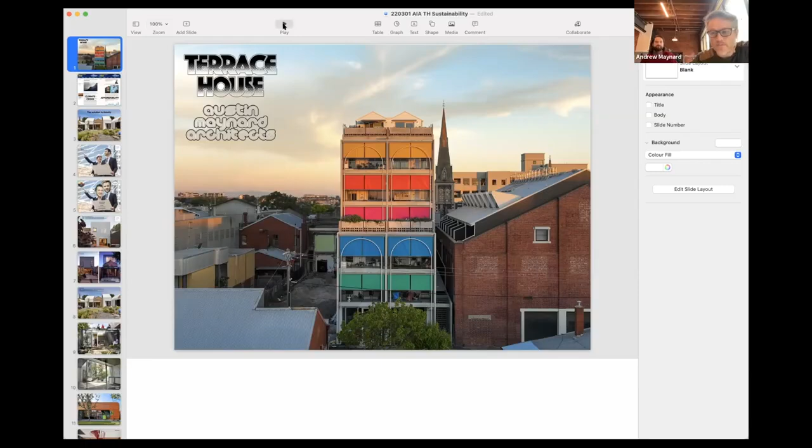So Mark Austin and I became developers. We've never done multi-res before. We all know the problems. We've got a climate catastrophe unfolding and affordability's never been worse.

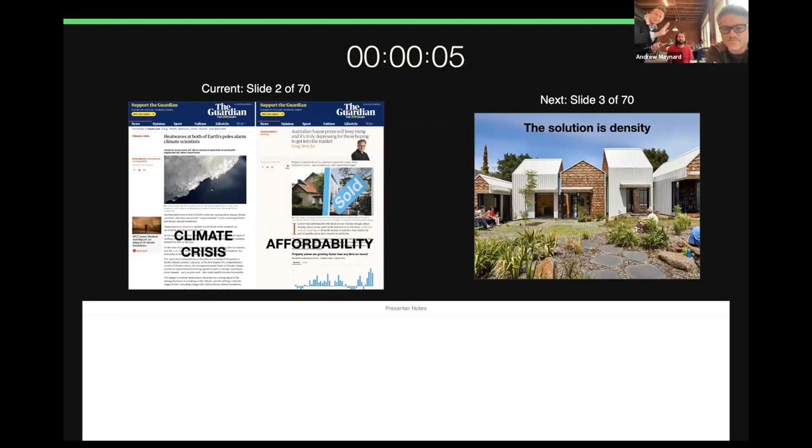Knowing that density's part of the solution, we've stayed out of it. And it's mainly because the developers that have approached us have been disinterested in solutions and in innovation. And they've really just wanted to leverage our brand. But it just got to the point where Mark and I sort of just said, well, shit, we better do it ourselves, put our money where our mouths are.

And the core things that we wanted to deal with were deliberative design. So just like we do in single residential, get to know our client base because they're owner-occupiers and design with them. That we centrally tackle climate change, that we have really good urban regeneration, we're financially sustainable now and into the future, and we use democratized capital.

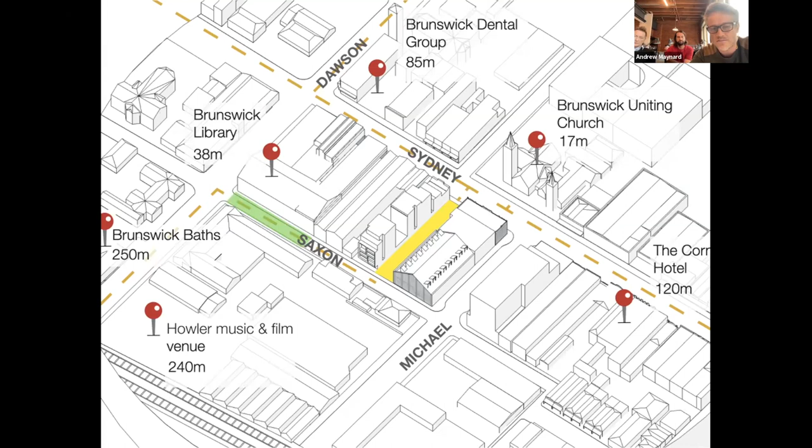Incredible location, right next to Brunswick Baths, the library, little pocket park right near Barkly Square shopping centre, but an odd site in that it faces east-west. It's only 10 metres by 57 metres long, so we only fit 4 apartments per floor plate and no aspect towards the north.

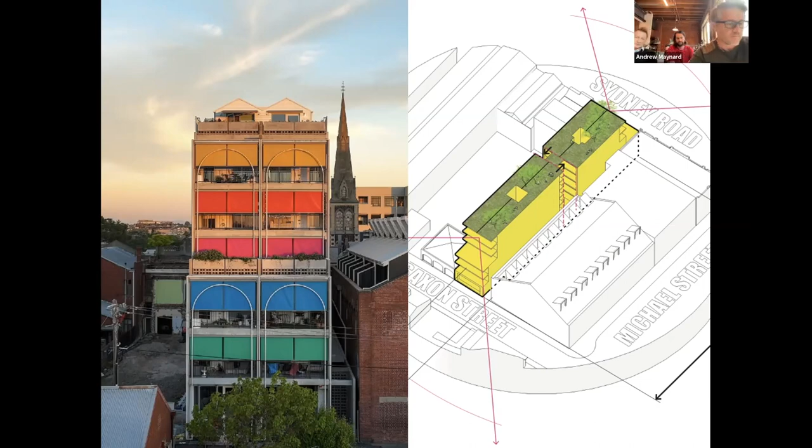So with east and west orientation, we invested in external roller blinds that not only protect the glass, but they actually are all the way out protecting the balconies, which is unlike the vast majority of apartment buildings you see all around Melbourne. All of this unprotected glazing, complete thermal heat sinks, relying on air conditioning to moderate temperature.

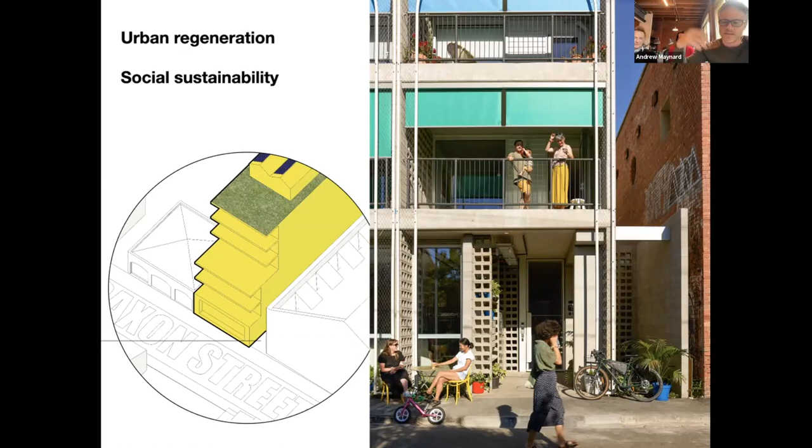We've got our main pedestrian access coming off Saxon Street. Saxon Street has got a checkered history, violent crime and the rest happening on there. So it's part of regeneration, having passive surveillance, but also activity in a cafe to help repair that part of the street. In terms of language, we're trying to tie in with the beautiful arches all the way up and down Sydney Road.

But before we built the building, we built the community. We've got artists, nurse, police officer, lots of people that have sort of been priced out of the housing market. They all had very similar sort of aggregated responses. Minimum costs now and in the future, maximum resilience. They wanted a tough building they could live in forever, and they wanted it to be simple where they could imprint themselves onto that building.

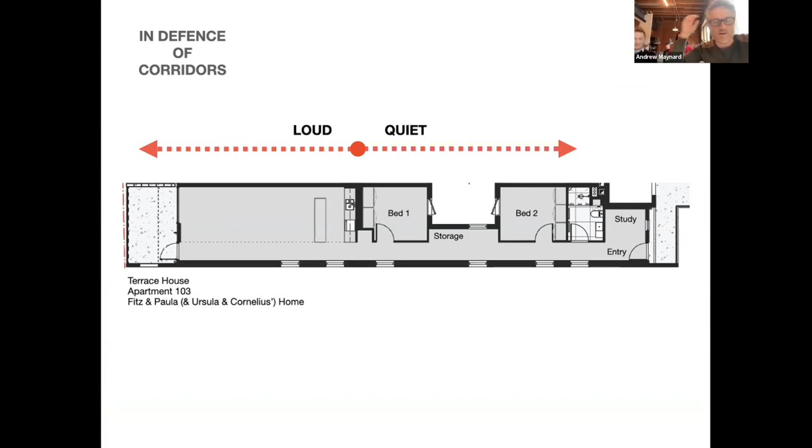And big was family. They wanted something in between a home and an apartment. So because of the size of our buildings, we went for a stacked terrace house plan. Sustainable transport, the bikes are all stored right at the entry gate. You don't have to bring it out of a basement or anything like that. Your bike is right there. It's the first thing you either pick up or drop off when you come home.

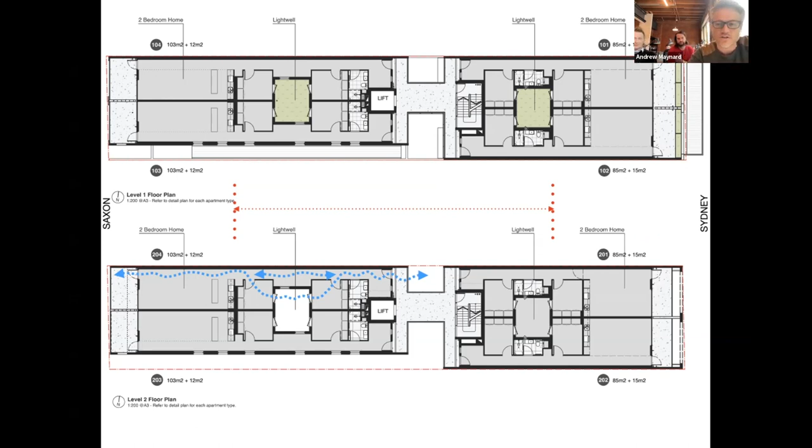Long, thin plans, incredibly well insulated, but if you need to purge it, you can throw it all open and get breezes through it. Between those red lines, it is identical on every single level. So we've got this great efficiency in terms of structure and servicing as well, driving down costs and increasing efficiency. Beautiful study spaces that create these communities within communities. But the fun stuff, the numbers.

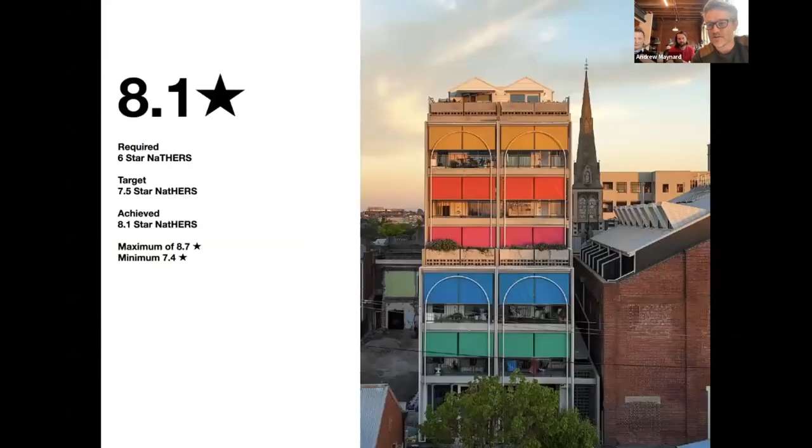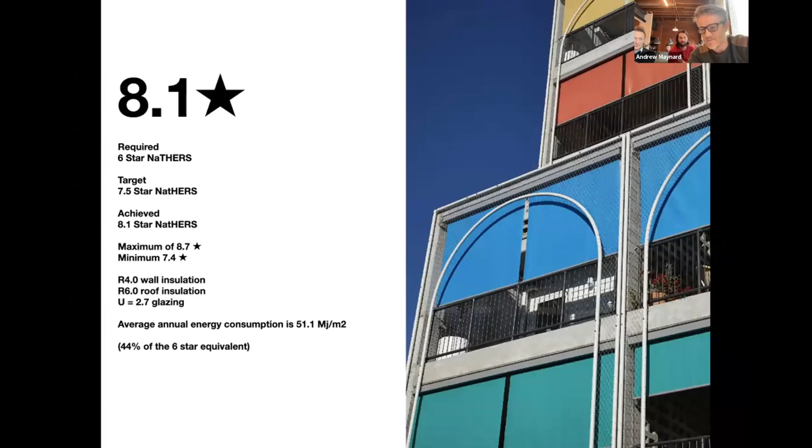8.1 stars. At the time when we got the permits, we had to achieve 6. We were aiming for 7.5 and we got to 8.1, maxing out at 8.7. You know, bulk insulation, really efficient thermally separated glazing, average annual energy consumption 51.1 megajoules per square metre, which is, by our calculations, 44% of what it would have been if it was a 6-star building in terms of the energy use consumption. The BESS rating, 77%, so obviously, you know, 70% being excellence, 50% being best practice.

The air tightness, out of control. We were aiming for a very high level of air tightness and we almost doubled it to almost Passive House standards.

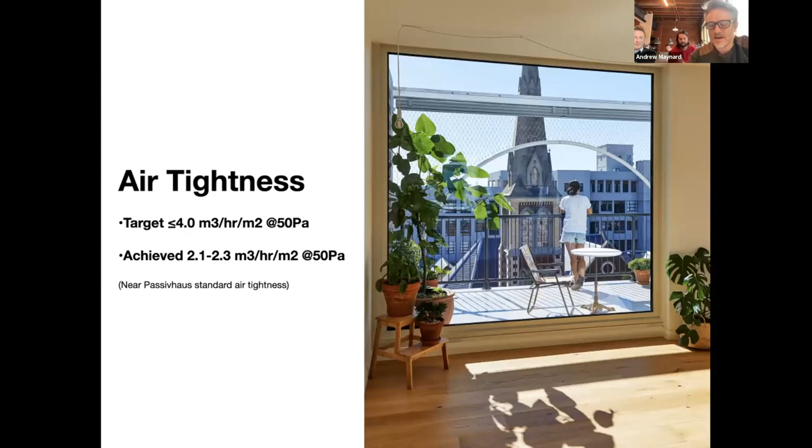And that's because we pushed the builder bloody hard, because we were investing in energy recovery units in every single apartment. They have their own energy recovery, so it's constantly moving fresh air and doing really efficient heat exchange with minimal energy loss. We're right in between trams and trains. So this is all about being able to get fresh air constantly and moderate the temperature without noise and dust.

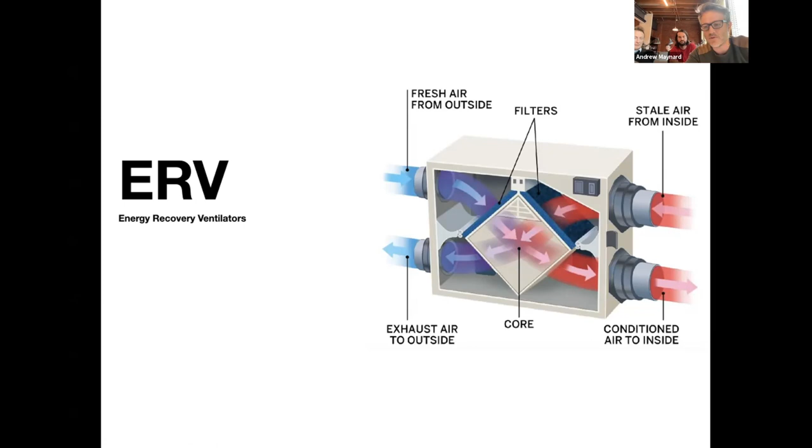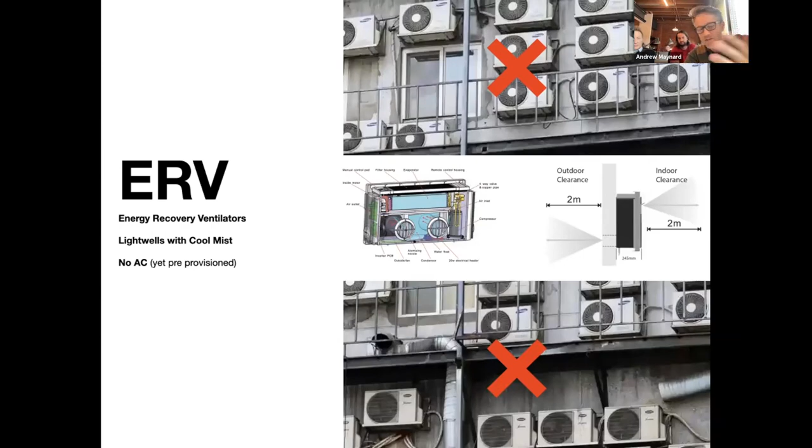In the light wells, we've got misters that are dropping the temperature by about 10 degrees, and that's where we're doing the air intake for the ERV, so we're already pre-cooling it in summer. No air conditioning, but it's designed, it's pre-provisioned. So in a climate crisis, who knows what the future will bring, and also people with health and age may need air conditioning, so that can be done in a very clean and efficient way.

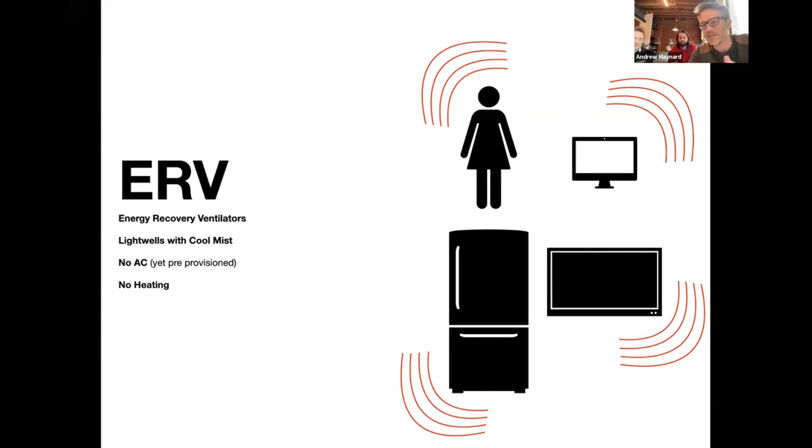There is no heating. Torsten, our passive house consultant, has designed the thermal envelope so that all the toys in the house and the human body will keep this temperature, and also the ERVs will keep it steady. But of course, the purchasers know they can add a really high efficiency electric panel if they need to in any space, knowing that the air is constantly circulating.

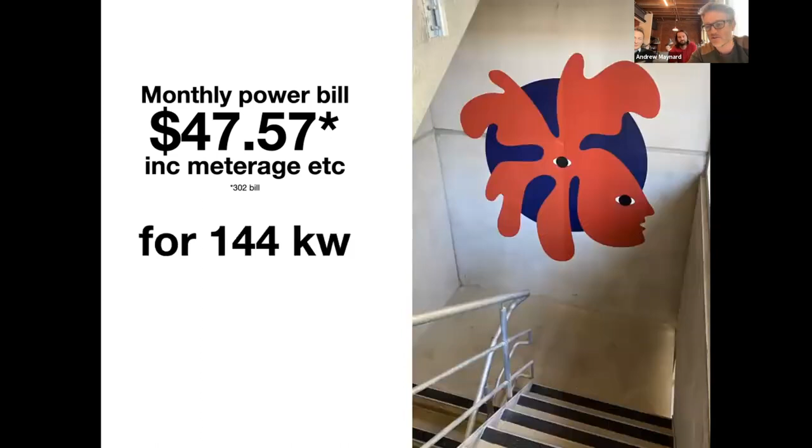Monthly power bills, it's only moved into in November. So this is all kind of rough information, but you know, $47 including meterage for 144 kilowatts. Average Victorian power bill, as you probably know, is about $137 a month.

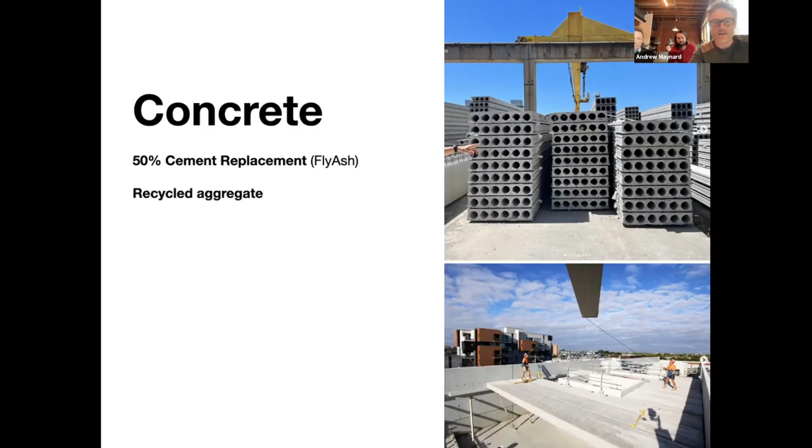The concrete is awesome. Hollow core, so we've got less concrete, but also we've taken out the central wall that goes through. So we've gotten rid of all that concrete, which is great for sound transmission as well. And we're bridging with planking elements. We've used 50% fly ash, recycled aggregate. We're going for 50% recycled water through the use of concrete. We did 100% with Kapitol, the builders.

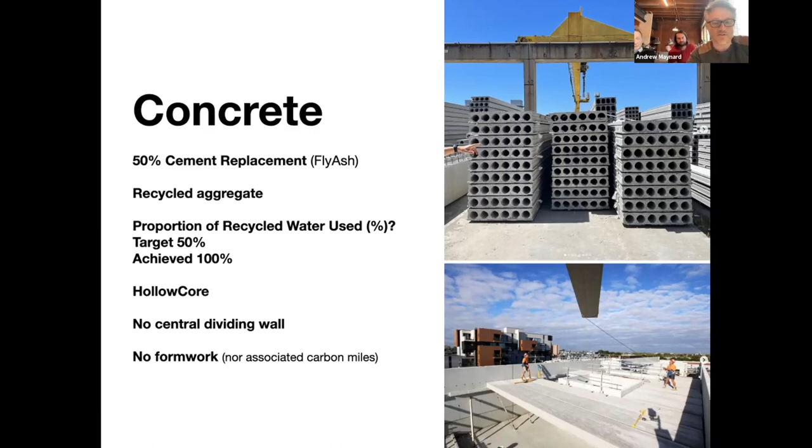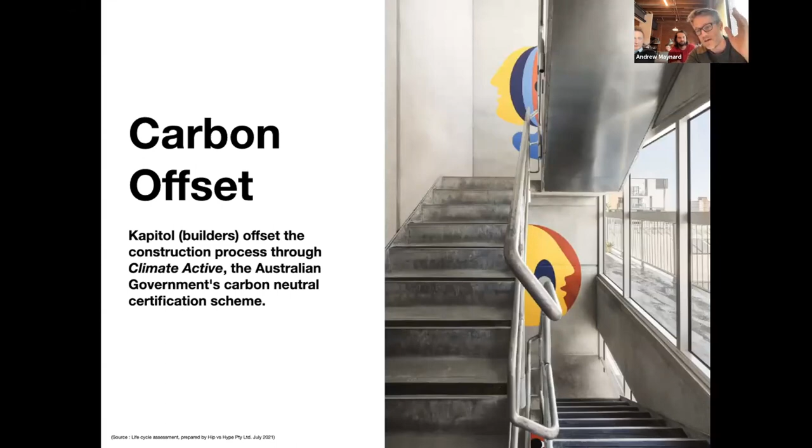No central dividing wall. That means no formwork as well. No mucking around, pouring wet concrete, having trucks and all of the carbon miles that are associated with that. So it's a sacrificial formwork as well as a structure. And then carbon offset, I found out about an hour ago, this hasn't been done yet. Kapitol doing carbon offset for the entire construction.

Carbon bill, all electric, no gas, fossil fuel free, 11 kilowatts of solar, which is the max we could get on this roof just because of orientation issues. Embedded energy network, buying green energy cheaper than you can buy coal. Electric cooktops, electric barbecue, low VOC.

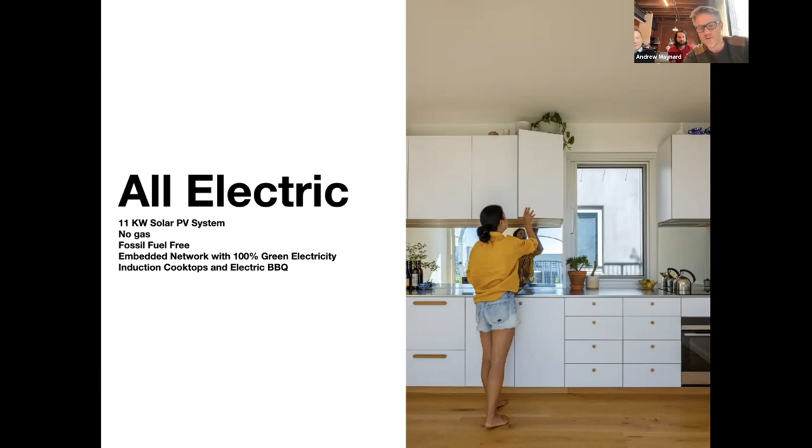1 minute remaining. What's that? Oh, 1 minute. 1 minute, yep.

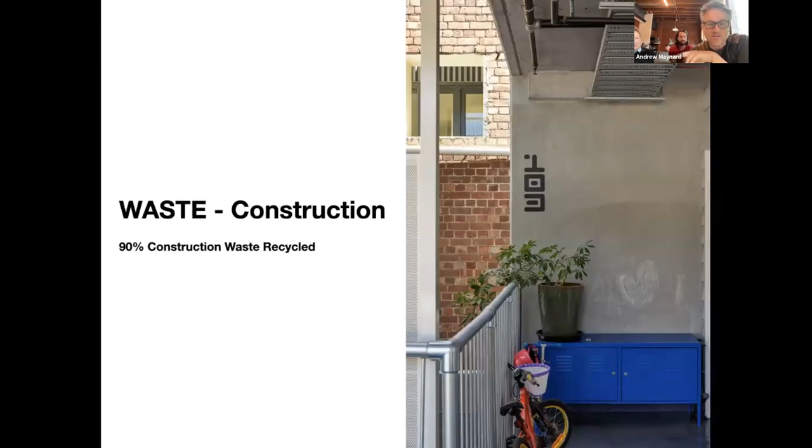Master switches, so you can shut down the apartment when you leave. Almost 90% of construction waste was recycled. And in terms of a great management plan for waste for residents as well, including battery and electronics recycling.

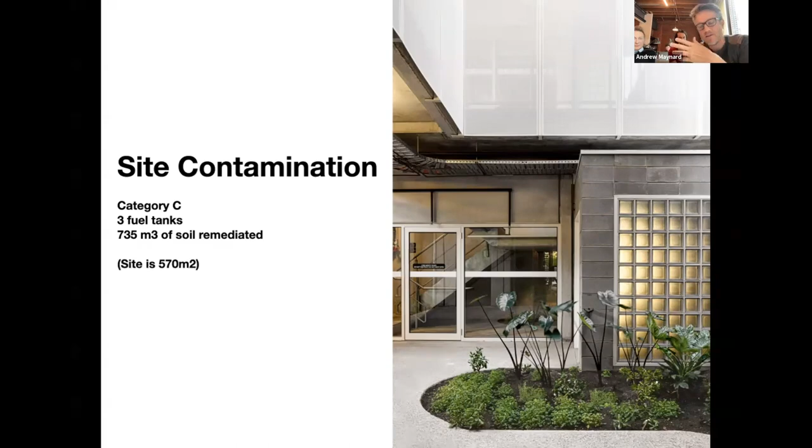The site was absolutely stuffed in terms of contamination. We found 3 tanks, and we pulled those out, and we remediated 735 cubic metres of soil. It's a 570 square metre site, so we basically dug a basement and remediated it.

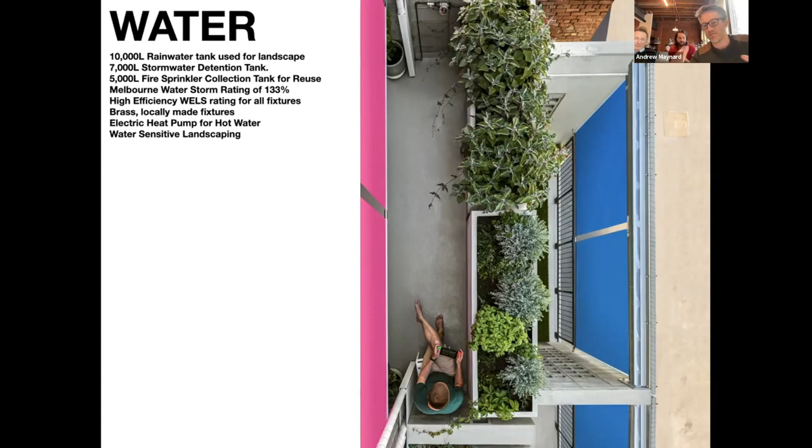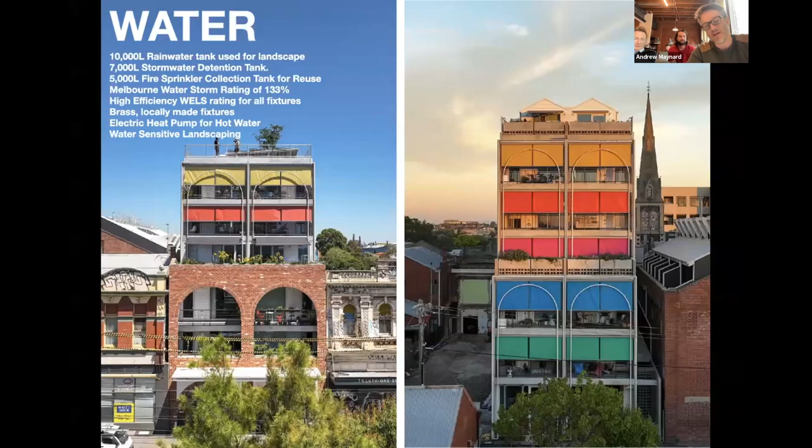10,000 litres of water for the gardens. We're capturing all of the sprinkler purge system too. Instead of just purging it out into stormwater, we're reusing that on the gardens. Great fixtures and fittings in terms of efficiency, and trying to get as much water onto the gardens as possible so it looks like that as soon as possible in terms of greenery on the building and reducing heat island effect. Almost done.

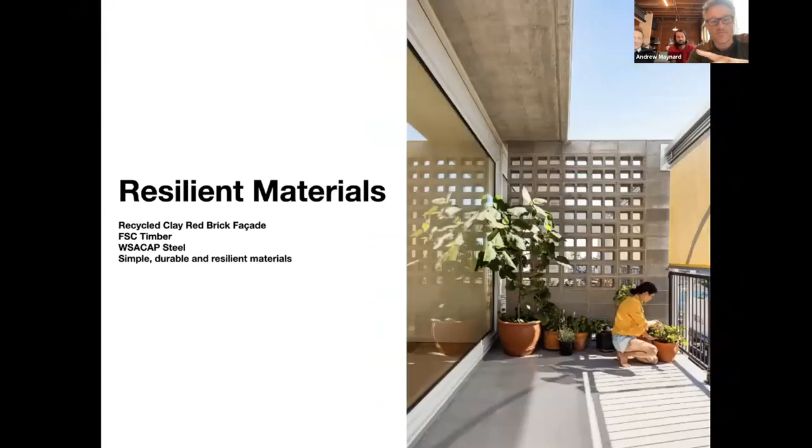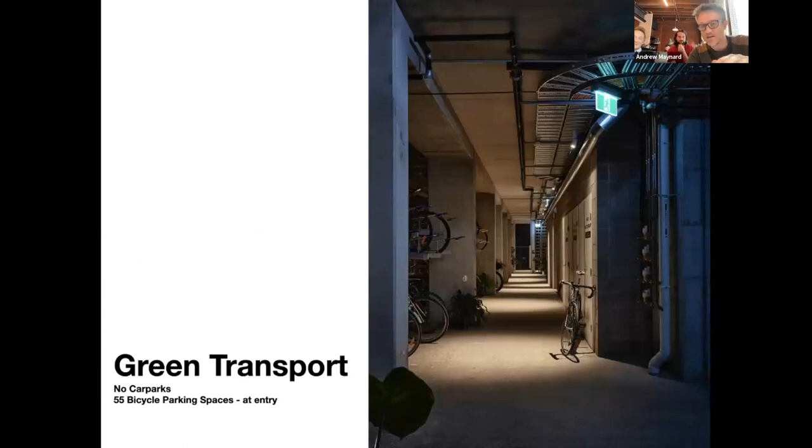Super resilient, simple materials. That was a big part. Not only does it drive costs down, but it's a big part from the owners. Green transport, 55 bikes, no car parks, car share right next door. We're in between a tram, train, and bus as well, and bike paths everywhere. 0 cars means we don't have a roller door, we have a cafe.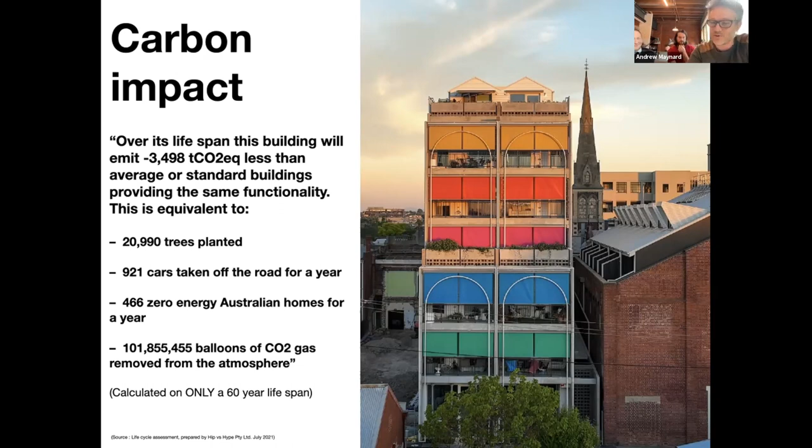And this final slide, this is calculated on a 60-year lifespan. Obviously, this is going to be here at least double that, but you know, we've saved 102 million balloons worth of carbon predicted in the operation of this building because of the efficiency that we have.